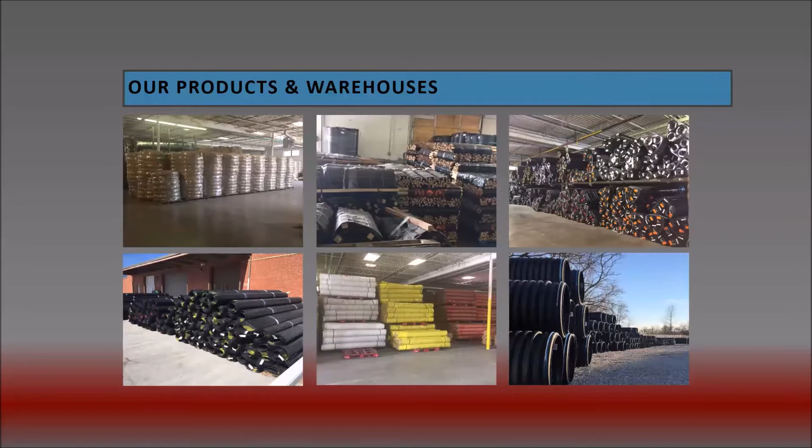I love to talk about the water cycle. I just got off of a national conference this morning where I was able to talk about some green infrastructure, and we are just a tiny piece of the global spectrum there for water. And one of the speakers this morning said that fresh water, stormwater, if you will, all together is about 2 teaspoons out of a gallon full of water that would make up the global water on the earth. So that sounds like a little bit, but it's huge importance because we've got to do the best we can with that tiny little piece that says fresh water. And one of the most important things we can do is protect our soil and our environment from excessive water.

My guest speaker today is Tyler Searle. Tyler is Muscle-Wall's technical sales engineer. He studied at Utah State University in Logan, Utah. He focused on hydraulic engineering and received a BS in civil engineering. Hey, shout out to my fellow civil engineers. He is a transportation erosion control supervisor certified through CDOT, Colorado DOT. He specializes in applications with environmental risk mitigation needs. He aims to use his engineering knowledge and project experience to create a paradigm shift towards a safer and more resilient project future.

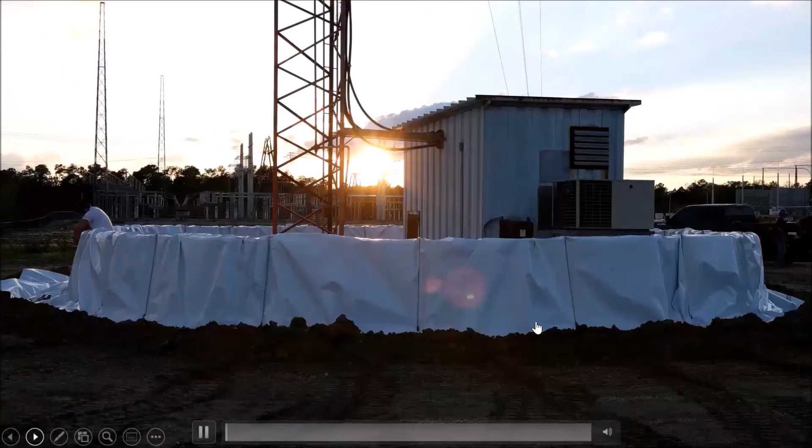Okay, we have just a few short videos throughout this presentation. I'll just let the videos play through and then we'll jump into the details on the back end. I think they really show some valuable insight into the system being used on site and in live applications.

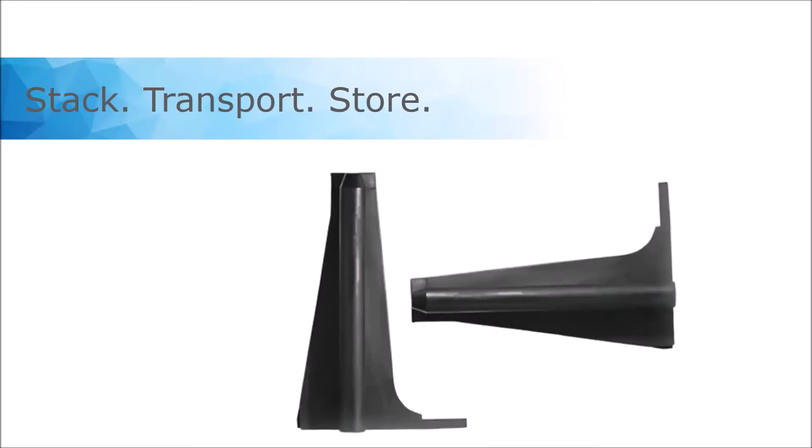This just shows how the walls stack and are inverted. And then this shows how our system is stored and transported. This is a key asset with the Muscle-Wall system, especially when we're competing against sandbags, rock gabion systems, concrete barriers, what have you. Essentially we're shipping air when we're mobilizing the product.

Just for a quick number comparison, I like to draw the engineering number comparisons: one fully loaded semi-truck can hold over 1,500 linear feet of our 2-foot barrier. If you're looking at a similar project with 1,500 linear feet of barrier using rock or sand materials, you'd be at over 41 semi-trucks just in material alone. You can imagine the difference in logistics and costs of shipping, and also the toll on the infrastructure for that municipality or what have you.

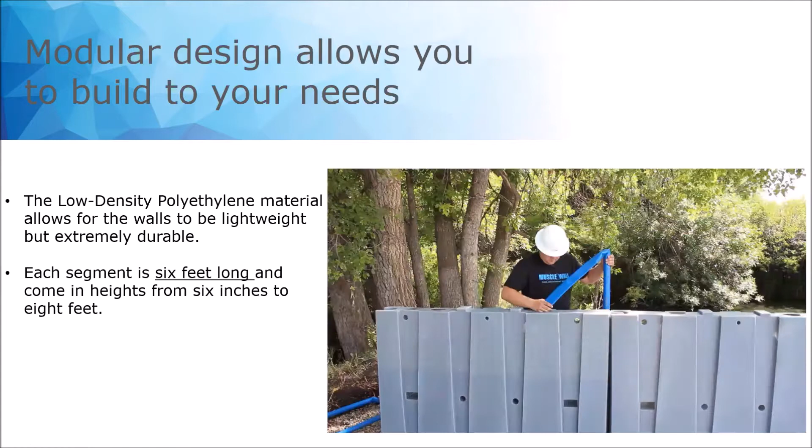And then I'll let this video play. Begin by setting your first wall in place, and then subsequently sliding each 6-foot section in place using a coupler joint connection on the end of each wall. Once a section of walls have been set into place, you'll want to begin filling each unit.

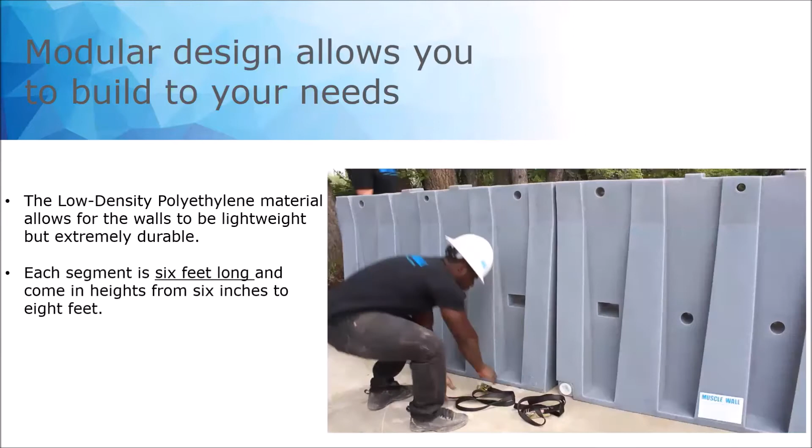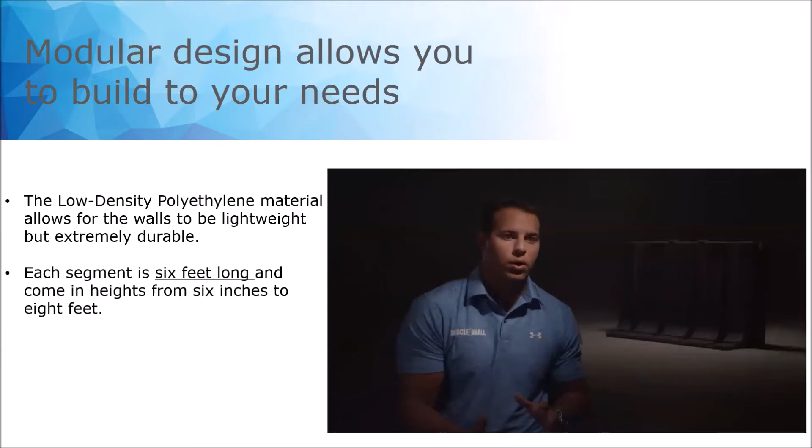The liner is then deployed over the muscle wall system. On the back side of the system, cut a small horizontal slit in the liner. Pull the non-ratcheted strap through the slits and then tightly secure them down.

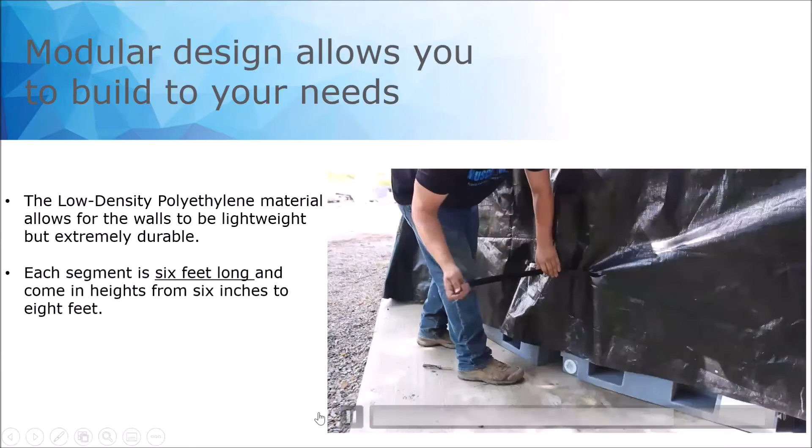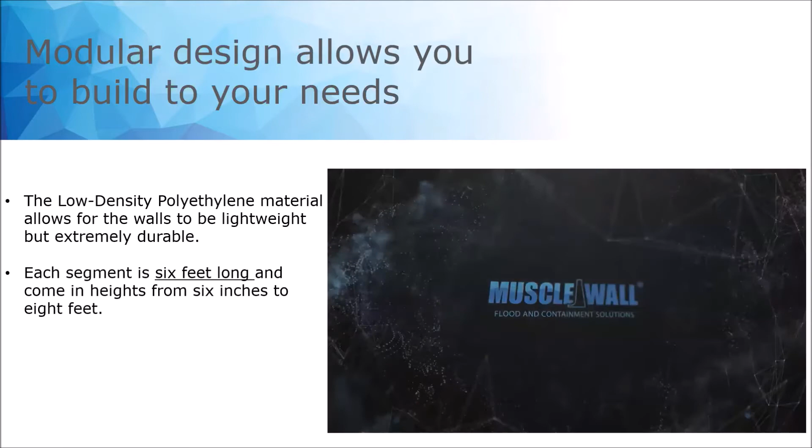Okay. So that's essentially our SOP video. All right, let me jump ahead to the next slide here and go back one. So what I just showed was our SOP video. That's how we deploy our system. Essentially, it's those 4 simple steps. You drop the wall in place, you fill the wall with water to match your risk, and then you attach liner and straps. Depending on your application, there'll be some versatility in how you can attach a liner to complete the system.

Moving forward a little bit, I'm just about done with the logistical and engineering side. Bear with me, guys. I know this is just kind of tedious a little bit, but we're going to get into the pictures and applications, and it'll make a lot more sense.

Really quickly, though, I wanted to show that our walls can interlock and connect at these different heights. So right here, we're starting with a 6-inch wall on the front side, drive over wall, then moving to our 2-foot, 3-foot, 4-foot, and then 6-foot wall on the back side. This is for a refinery down in Houston where they wanted to have a sloped wash station.

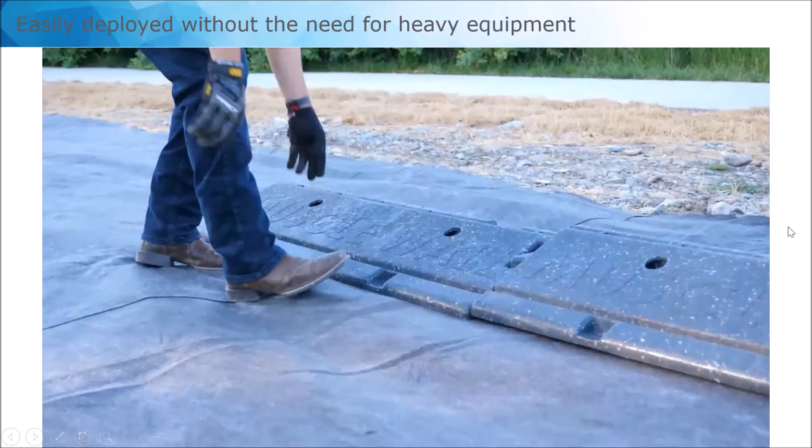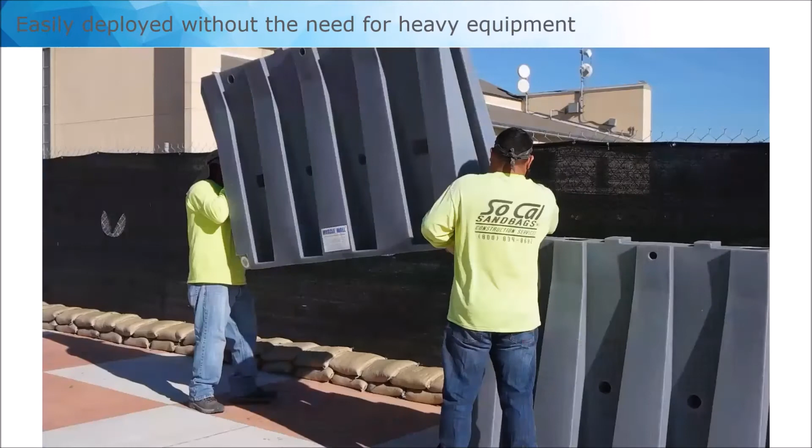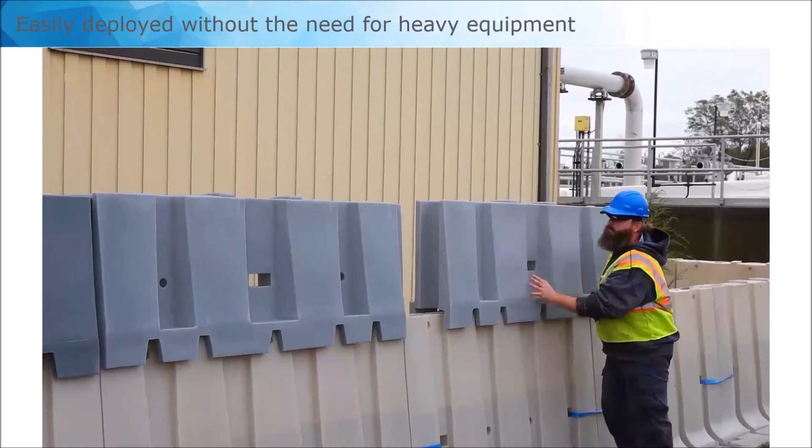And then this shows our walls actually being dropped into place by manpower alone without heavy machinery. This is our 6-inch drive-over system for wash stations, site containment. That's our 2-foot high, 6-foot wide muscle wall system. And that's our 4-foot high wall. As you can see, it has that LDPE play. So it's lightweight, it's mobile, they're able to drop it into place, but then it also has that malleability to it. It's not a rigid system, so it does have some flex to work with being dropped into place and work with the dynamics of pressures.

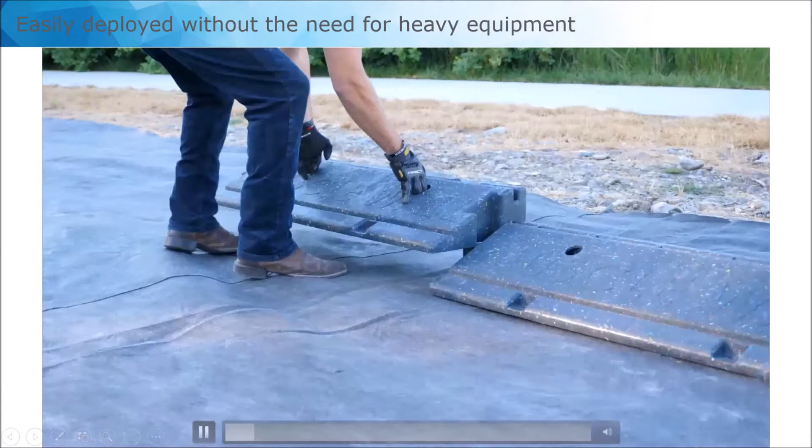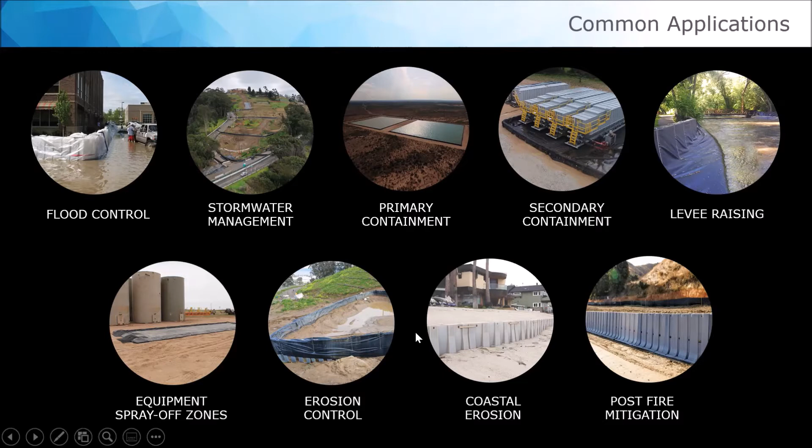And then I'm finishing up the overview and logistical side here, but again, I just wanted to bring up the idea that at the core of our solutions, what we do is we design and have engineered retention devices. And so they're used in a variety of different spaces, flood control, stormwater, and then containment and erosion as well. And we'll dive into some of these specific details as we get going into the presentation.

Okay, so I'm gonna just jump right into some applications. This is where it's gonna be a lot of fun. And several of these we've worked with Bowman and the ASB Quick Supply Cascade team, and so I'll point out those projects. Specifically, this project right here is a Bowman project where they helped us out. And this is a stream diversion over in Colorado.

So that's that intro video where you're seeing that stream diversion really at peak flow. This is that same stream diversion when we deployed it over 2 months ago at this point. And so essentially, again, our system is a mobile retention device. And so it can be used to divert flow, control flow, capture it, what have you. And so right here, we're looking at doing a stream diversion.

Originally, they were looking at pipe options, concrete jersey barrier options, what have you, and then staging the river so that they would pull the river to one side and then pull it to the other side so they could replace those abutments and the bridge. And ultimately, we got in there and decided that we could use our system and save them some staging and just divert that entire stream through our channel, and do a 4-foot channel right here.

And so essentially what we did is we lowered the walls into place. Again, they're hollow walls. And so we floated them upstream, teed in the corner units or towed in the front walls, just sunk those into place. And then one by one filled each wall and dropped them into place. And then our last step was to attach that liner, making it impermeable and just capturing all of that water.

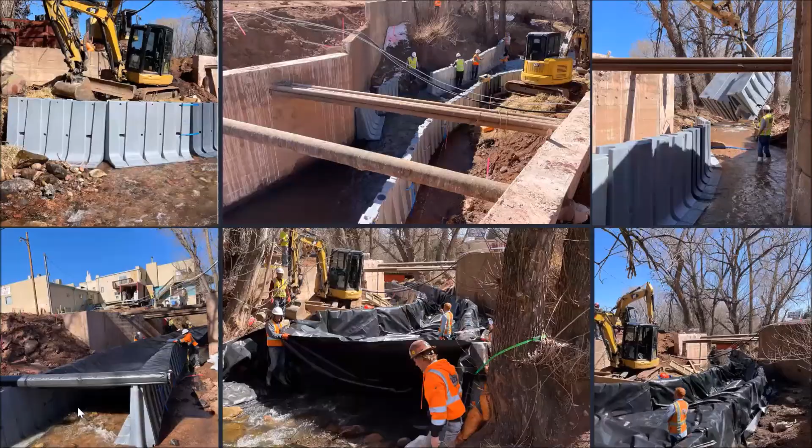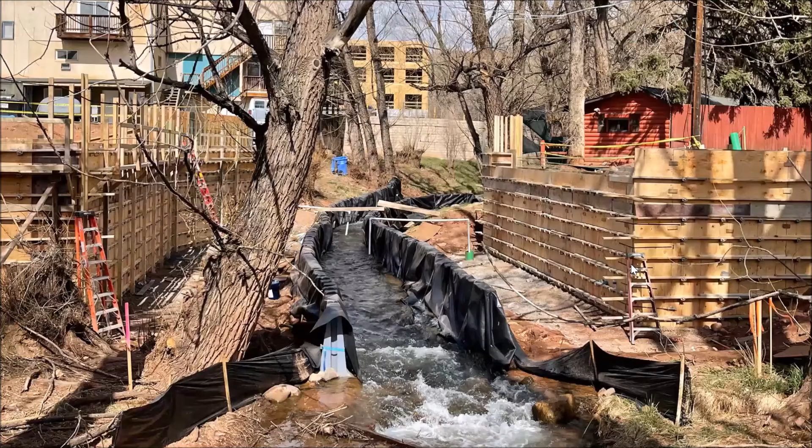And then here's some pictures from that project. Again, showing the system being towed in on the front side and then working down that slope one wall at a time. And then we staged the liner over the channel and then attached the liner and dropped it in right in front of the walls at the infall of the stream. And then just another picture, that's the same stream diversion, just doing a fantastic job. And just one of our key applications.

And just a note, total deployment time with a team of 4 was 7 hours. And that included everything from unloading the semi-truck, staging the site, moving a couple of rocks just to get a relatively flat surface. Our system does work well with the topography and working around obstacles. But in some cases, we had to get in there and just move a few rocks that were in the way, just to flatten it out a little bit.

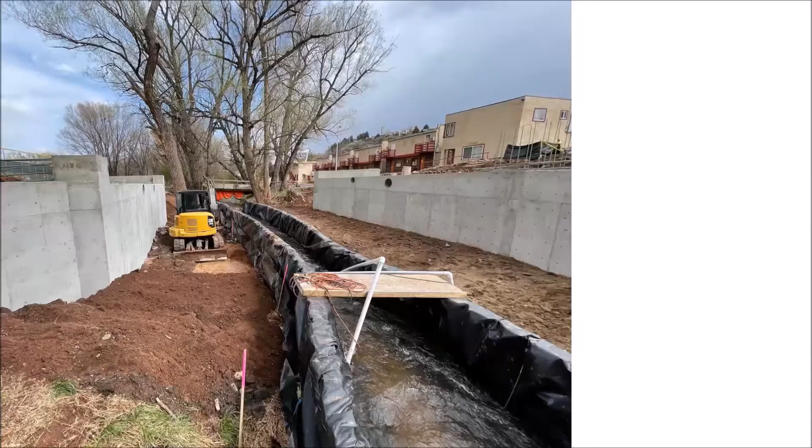And then just one of our last pictures right here. At this point, they've actually deployed new riprap and abutments. And now they've got a new bridge in that they just installed towards the end of last week. But again, one of those situations where they're really constrained on the real estate and the amount of space that they had to work with. And so they essentially made a Venturi weir with our 4-foot walls and just channeled all of that water throughout the section. But a really fun project that we worked on with Bowman.

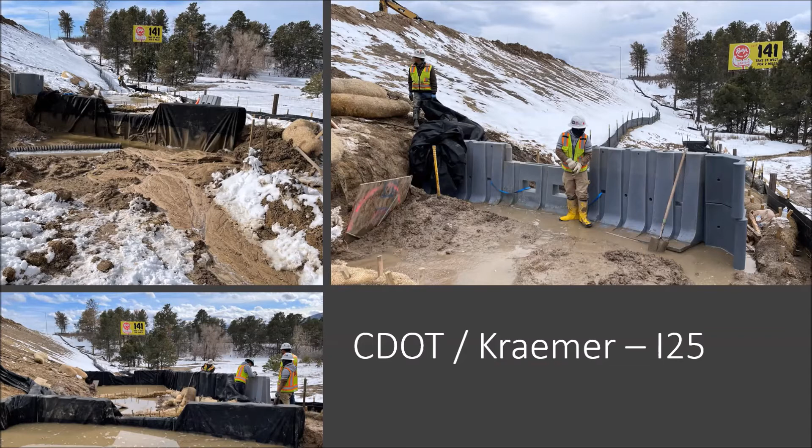And then this is another project that we worked on through Bowman and with the Colorado DOT and Kraemer Construction as well. This is right off of I-25. Essentially they've got an outfall where they have 5 acres of snow melt that all collects in one area. And so their traditional BMPs were just getting blown out. So they gave us a call. They had this emergency situation where they had crews out there day in, day out, just wrestling this section and continuously trying to reset BMPs as they failed.

And so they called us up, said it was an emergency situation, and we immediately got in there and deployed our 4-foot and 3-foot walls to have a weir type basin for their swale. And since then, it's been working fantastic. They've had these weirs in place for about 2 months now, and it's just completely eliminated their risk in this area. They haven't had to revisit it since.

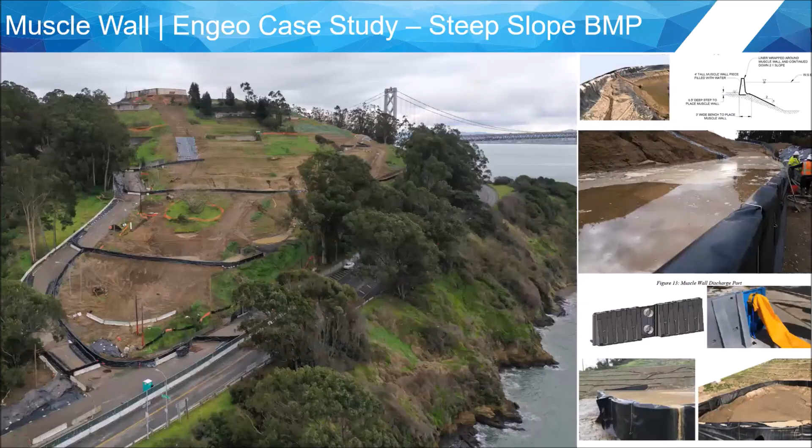And then moving forward a little bit, I'm going to dive into stormwater, a few of our different applications and recent case studies. And then after that, we'll hit containment. And then towards the end, I'll briefly touch on flood control, again showing the full versatility of the system. But on the stormwater side, this is a really fun project. This is actually over on the West Coast. This is Treasure Island. And they're using our system as one of their key BMPs.

And essentially, we're dealing with really steep slopes. And their traditional BMPs, hay wattles, silt fences, just weren't able to keep up. And so the engineers spec'd in Muscle Wall to appropriately defend against that risk. And essentially the construction crew just went in and dropped the walls into place on the hillside and then filled them with a hose. Again, they didn't have the mobility they needed to get K-rails and stronger solutions onto the hillside.

But at the same time, a really high regulatory space. If they had any failures, this project would have been at risk of failing or, at the very least, really significant fines. And so we got in there and just completely shut down their risk. We're a really robust, strong BMP solution. It might not fit into every project and every need, but certainly in those areas where you have high risk and high debris flows, erosion, things like that, that's where we're an excellent solution to match that higher risk.

And then we'll just walk through a couple of these pictures right here. But again, on this hillside, these are the same pictures from that project that I was just showing a bird's eye view. But essentially, they were dealing with 15 to 50% grades on that hillside. And so what they did is they installed a series of 9 detention basins to help dissipate that energy flow moving down the hillside and just capture as much of that sediment as possible.

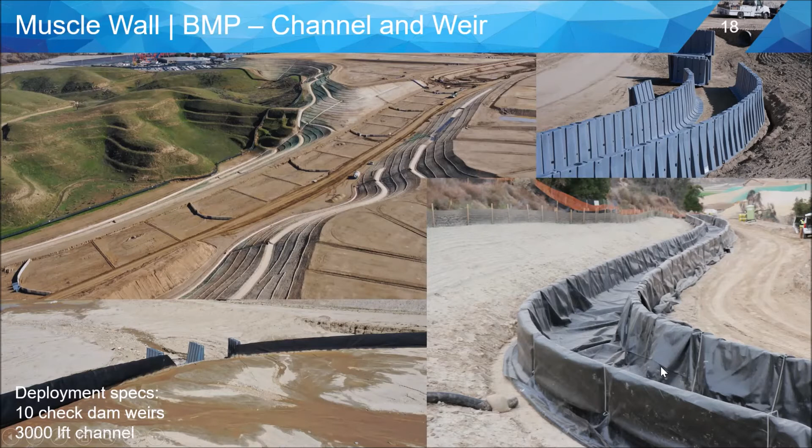And just a side note here, we're seeing 2 different liners being used. To the left-hand side, that's where they just wrap those weirs with the geotextile, letting that water filter through the kiss-throughs, through the juncture points of the walls, and then seep over that 2-foot weir. And then to the right side here, that's where they used an impermeable liner. And this is where we had a liner crew go out there and actually manufacture and custom design this liner on site as they went. But again, that's where you'd use an impermeable liner for that complete control.

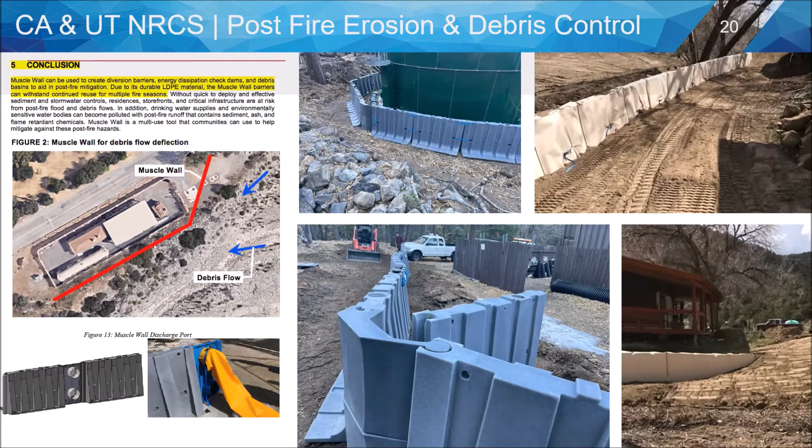But one of the notes is the California NRCS in their projects, they actually do not use a liner. They're just deploying the system as is without a liner, and they're looking for that 95% control where they're being able to divert that debris flow around the key infrastructure piece, but then they're expecting to have minimal seepage, and that's okay. They just want to, again, have control of the majority of that flow.

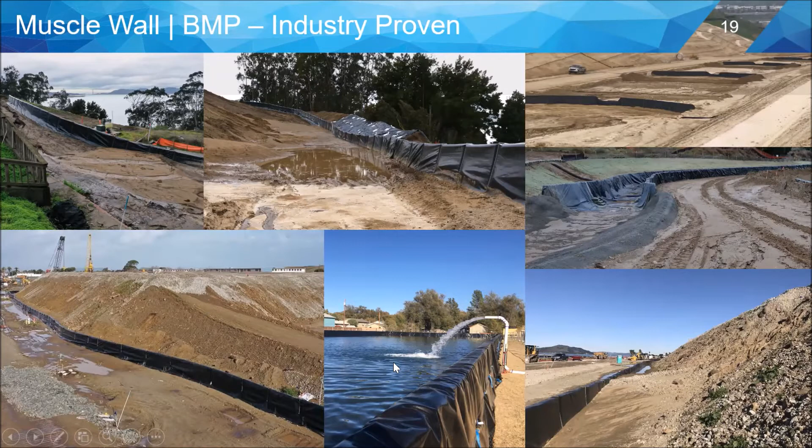And then just some finish up pictures right here, just a few more pictures to round out the idea of how our system can be used in a wide variety of ways in the construction and stormwater space, both again as a BMP solution for check dam weirs, also for channeling, and then certainly stockpile containment, whether it be stockpile containment for soils or also containment for fluids. Again, our system is engineered to retain and hold that.

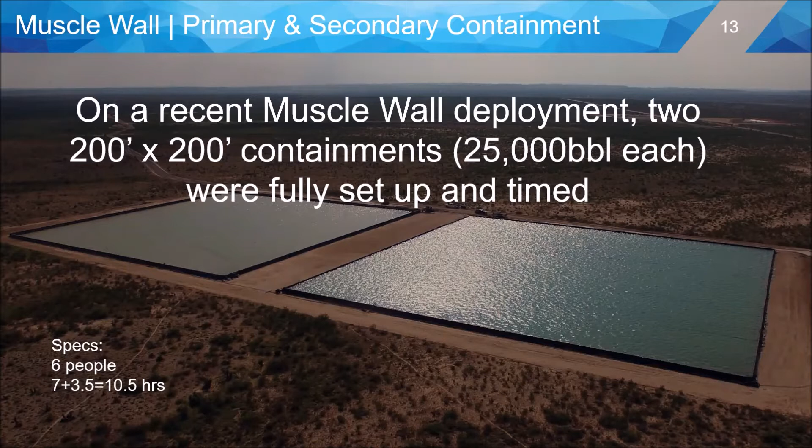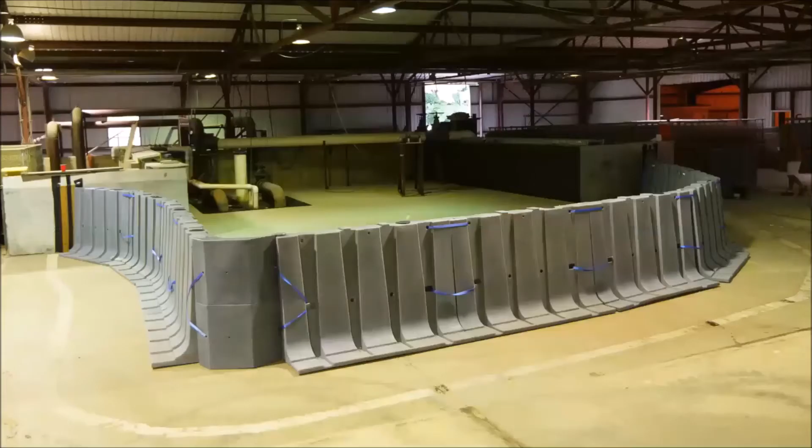Okay, so I'll pause it just for a second. But again, this is our Army Corps testing. So it's just a minute snip of that testing. And I'll talk over the testing as we go. But again, key video here.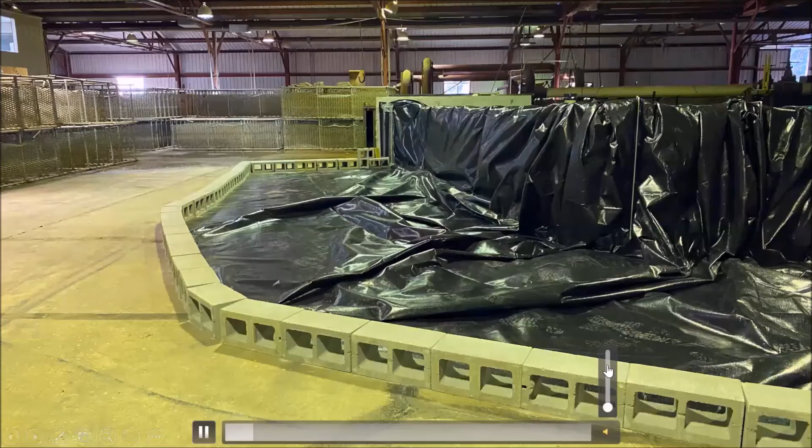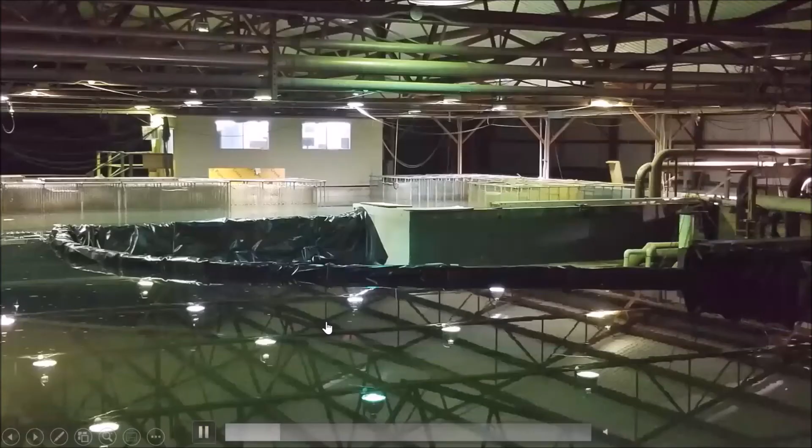Okay, so essentially what happened is they did a variety of tests over a 10-day period, simulating a variety of flood type situations, where they had a hydrostatic load test, they had debris impact, current flows, overtopping the system, and then also wave impacts as well.

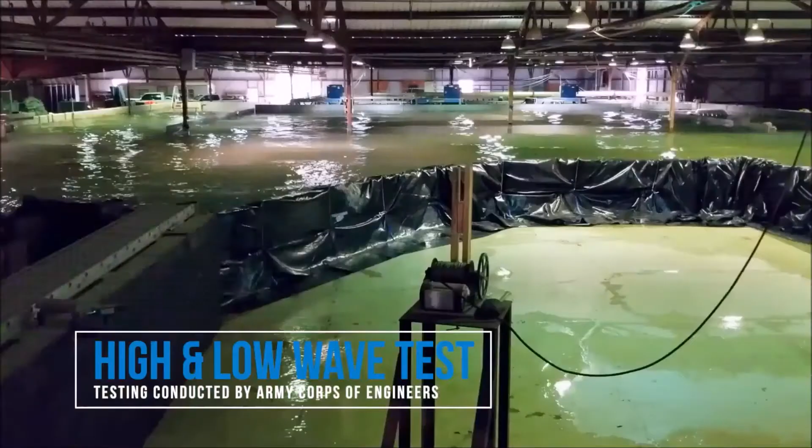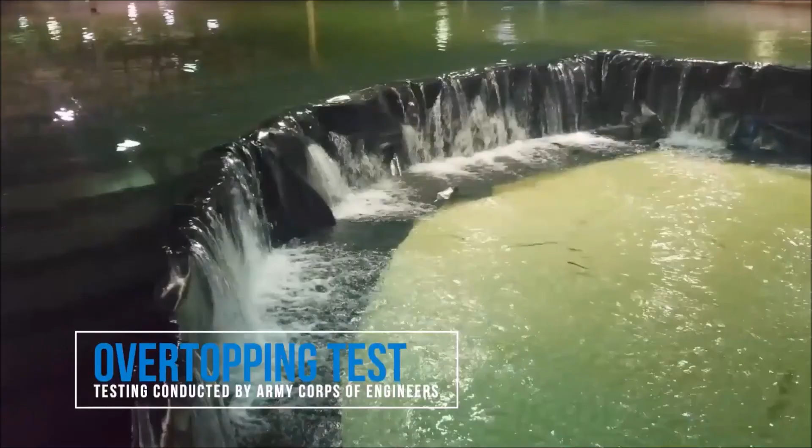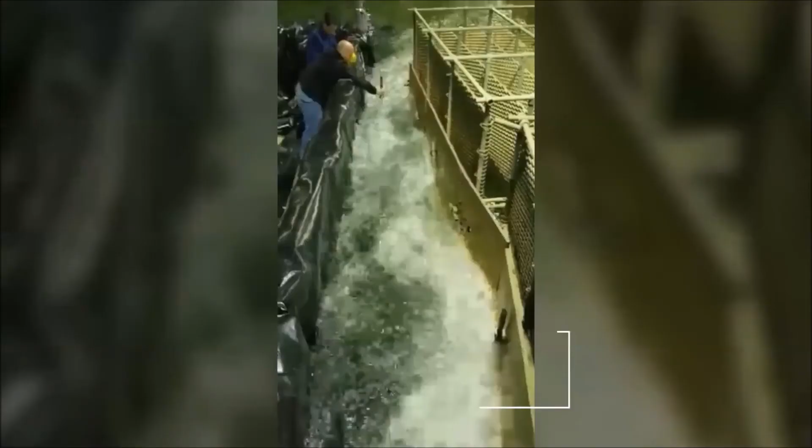Overall, we did successfully complete all of the U.S. Army Corps testing. And not only did we complete all their testing, but we tested best in class. So for our class, we're the only solution to pass all of their tests at a 4-foot height. And we're directly comparing against sandbags, HESCO barriers, and typical flood solutions. And what is also useful is that we can directly compare our system against the other systems that have been Army Corps tested and approved.

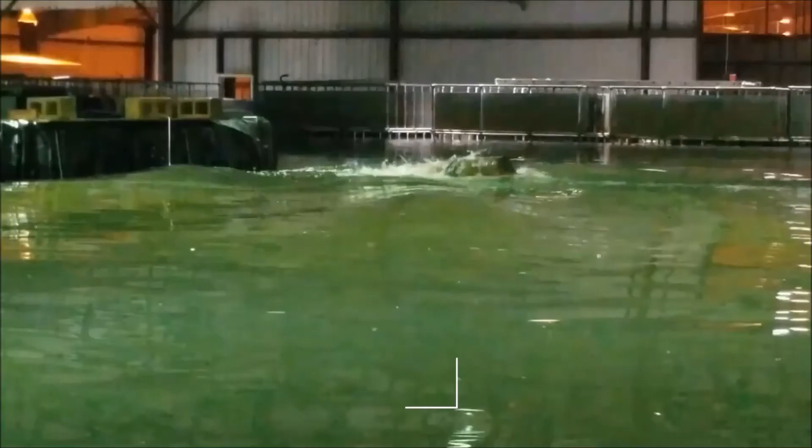It's the same report, and that way you can, apples to apples, see how our system compared and came ahead. And that's the debris impact test, again, showing how that LDPE material comes into play, being able to take on debris impacts and dynamic flows without fracturing or breaking.

Okay, and then just a couple notes here. I actually pulled this directly from that Army Corps report. And so this is just showing our system directly compared against their standard of sandbags. And so we certainly had a much faster deployment time, 7.5 hours compared to over 200 hours. That's definitely expected. But more importantly, what I want to draw attention to is that we had no maintenance throughout that entire testing period, whereas the sandbags repeatedly had maintenance throughout the testing over that 10-day period to be able to maintain their system.

And that's a key idea, is that our system is designed so that if it's deployed per SOP, there's little to zero maintenance that would need to be done. And that's definitely key on the flood side, because if that maintenance is not kept up, eventually they're at risk of a catastrophic failure and of the system failing altogether. And then again, just a side note, we also had a 4 times lower seepage rate.

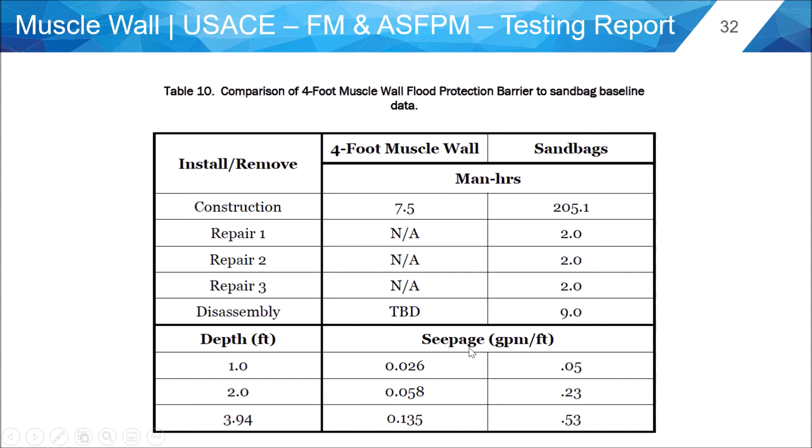And then just directly comparing, sandbags are still the #1 flood fighting solution in the United States, which is just crazy. But really what we're trying to do is bring a more sustainable and innovative solution to the market. And so we'll immediately save on real estate space, at deployment time, and also being a safer solution, but then also cost comparison at the end of the day.

What we found, and the Army Corps has found, is that when the actual true cost of the sandbags is considered with the material costs, the logistics of transporting the materials, labor to actually deploy the system, and then all the logistics to remove the system after it's deteriorated, with all of that considered, oftentimes we're as cost effective, if not more cost effective, on that very first deployment. And then again, having that reusability and all those valuable points of the Muscle Wall system, and being able to versatilely use it in other spaces as well, not just flood control.

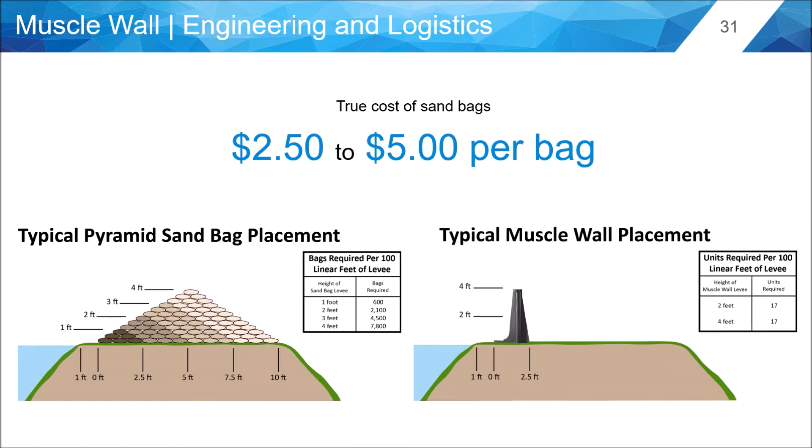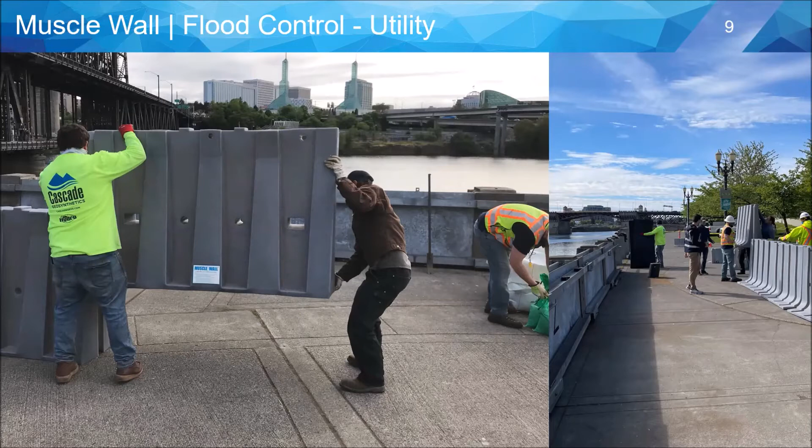And then on the flood side, just to kind of showcase what we're about, this was just about 2 weeks ago. We went out to Portland and helped Cascade Geo with this demo for the Water District and the City of Portland, showing our system and how it could be used as a flood defense system for the City of Portland. But this is one of those things where we'll go out there, we'll train any customers, anyone who's interested in learning more, we'll oversee that first deployment, and we'll offer that business support throughout the process.

And this is a key idea with our system, is that it is a perfect application for any wetland or marsh projects or stream projects where you already have water on site. That's not an issue with our product. As long as the water is shallower than the height of our system, we can actually float our wall into place and then sink it into place, attach that liner, and then trash pump the water from the backside over to the front side or the wet side of the system. That's how we do those stream diversions or cofferdam type applications, wetland projects, what have you.

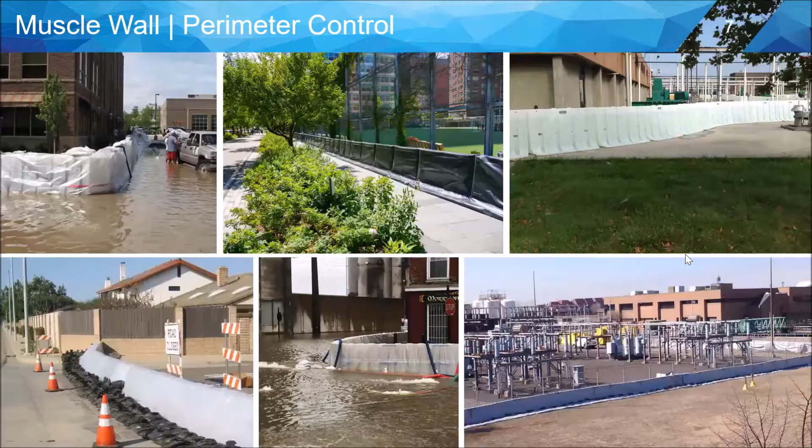And then on the flip side of flood control, definitely perimeter control is a key space for us, not only for infrastructure pieces, downtown areas, but also closing off those egress areas to have an effective community-based flood plan in place.

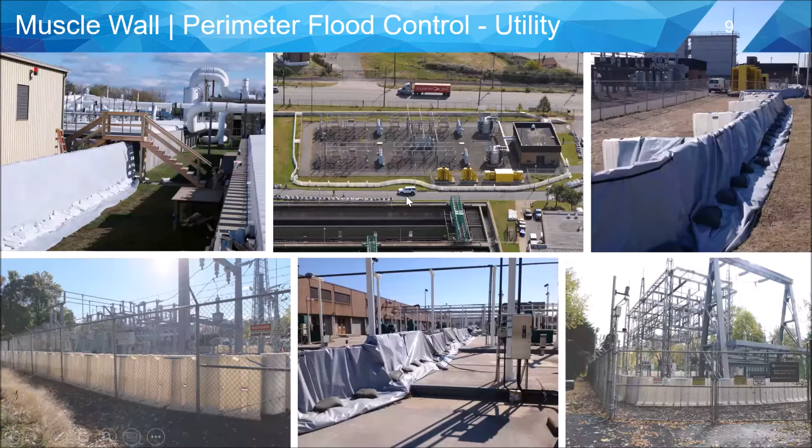And then I do want to just key in on a couple of these pictures of our system being used for perimeter controls for utilities around the country. But a couple ideas here. One, in the top right picture, you're seeing our system teed in to this flood wall right here. And this is actually for Passaic Valley Sewerage up in the Northeast. And essentially, this is their first line of defense for their seawall against those nor'easters.

And so with those waves and the expected storm surges, they just really felt like this wall specifically would be at high risk. And so what they did is they just teed in 4 of our 4-foot walls filled with water to add the extra column support on the backside, just to give extra support with those storm surges.

And then also showing in the bottom middle picture, showing our system hopping over a curb. Just a side note, but at each juncture point, the walls can shift. So they can shift vertically to hop over curbs or work with the topography as you need it to.

But again, just showing our system in a few different ways here and showing it with the liner and without the liner. Oftentimes they'll deploy it without liner for flood control if they're going to leave it up semi-permanently, just with egress areas set to the side. And then they'll just deploy the liner as need be, depending on the UV resistance of that liner.

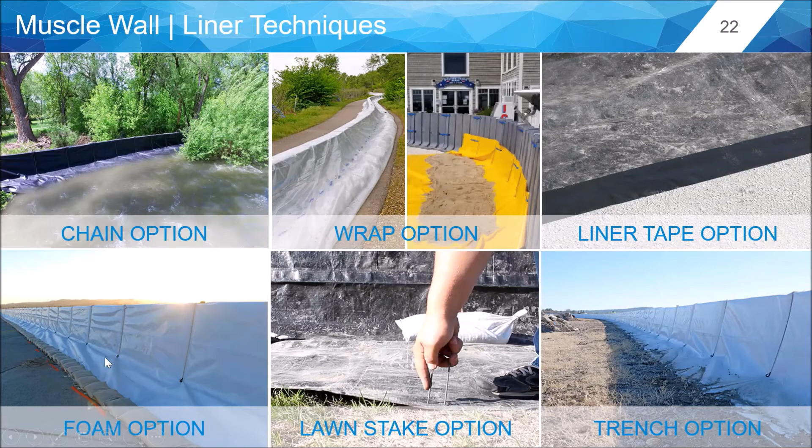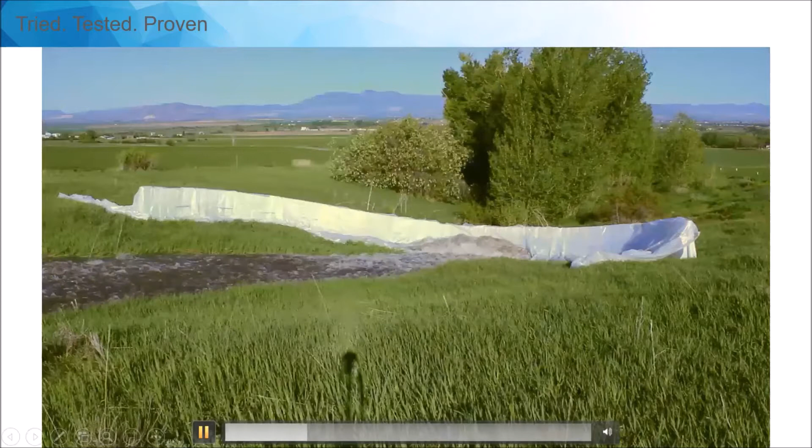And then this is some of our early testing. This was testing done with the USU Water Lab and the US Army Corps of Engineers. Essentially what we did is we simulated a flash flood type situation, just releasing that storage of water and letting it gain some momentum as it goes down the hill and then just crashing into our 4-foot barrier right there.

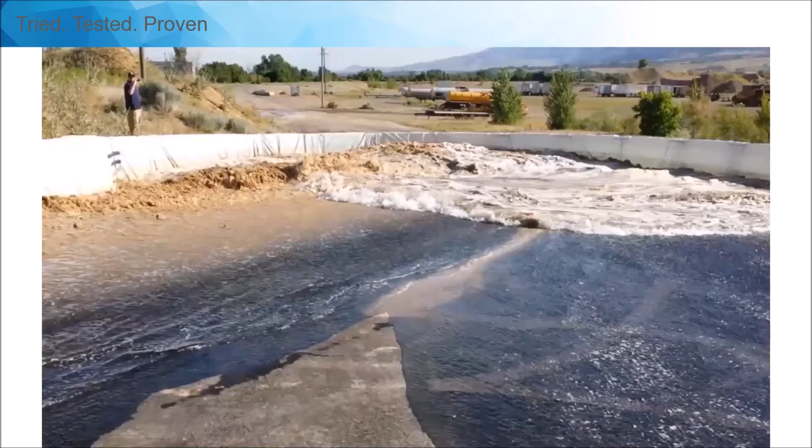And again, a few key notes. You're seeing a bend at the juncture point so that we can create this basin shape. You're also seeing that the system has no metal components on the backside. There's no stakes. The walls are just dropped into place. In that instant that the water or the material hits our system, it's acting to help put pressure on the toe to hold the wall in place. And so our system does do well with dynamic flows or flash flood type events.

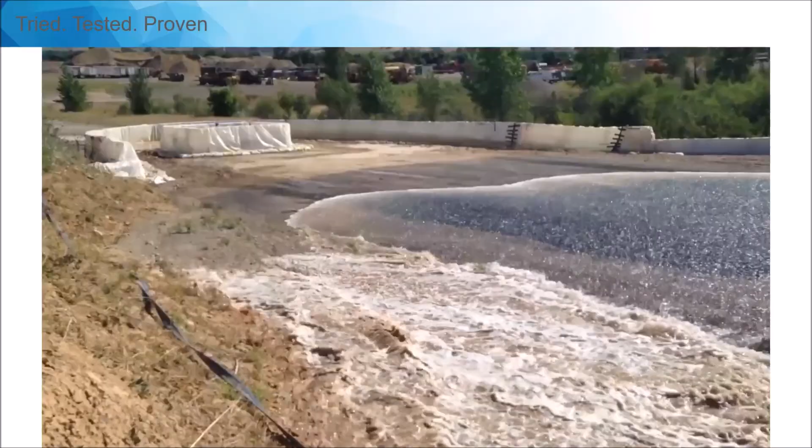Okay, and then I know I moved fast. I just wanted to fall in on a couple more key ideas here. Again, the system's just a mobile retention device. So it's designed to retain, it's designed to be mobile, and then you can fill it with water on location to add the extra weight and strength. And then each wall is designed so that it has a toe proportional to the height of that wall. So each wall is designed to retain at that height and even be overtopped without sliding, tipping, or failing in any way.

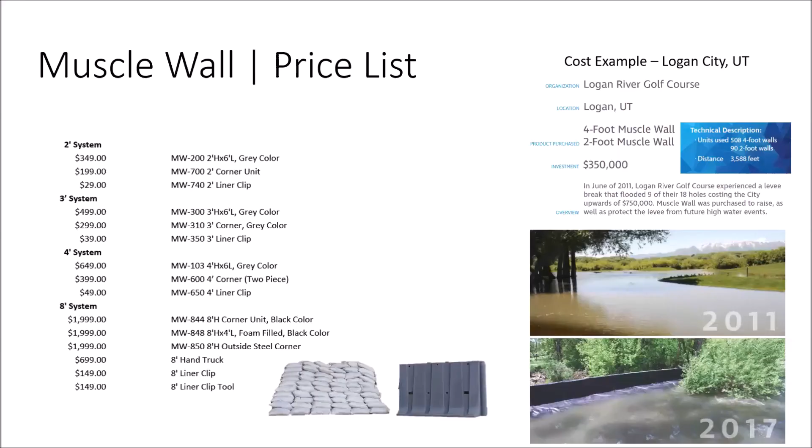And I have some personal experience. I'll just show the final slide. I'm going to tell a personal story before I go back up to that very first slide of yours. I may have told you this briefly getting to know you. I do mission work all over the country and sometimes Central America. And a lot of the mission work I do is natural disasters. I've done hurricanes, tornadoes, floods, a lot of poverty missions. And every one of those natural disasters or poor situations are unfortunate and devastating. But I can tell you there's almost nothing worse than cleaning up flood debris. And hurricanes Katrina and Rita brought a lot of floods with them, especially Hurricane Katrina.

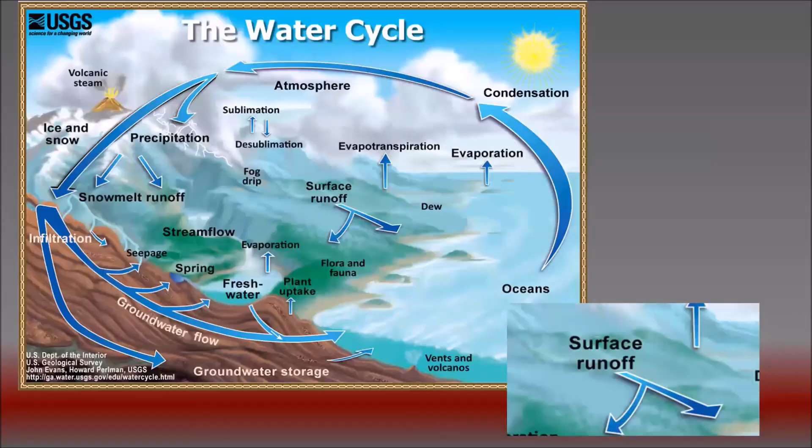So if someone ever talks about sticker shock with something like MuscleWall, wait until they lose a bridge in a case like this, where they didn't protect a pier well enough, or an end of a bridge, or some other structures downstream, or some other diversion near a dam when projects are being done. But if you start to talk about massive, large scale flooding, not only in private property, but large public features, it gets into the billions with a B, kids, billions. So it's hard to put a price on that kind of protection and risk management.

There are people in the world that are very good at risk management. Most of us that went to college for civil engineering, Tyler, you can attest to this, we didn't learn that level of liability and responsibility for risk management, not in the billions. Yeah. We talked about erosion and sediment control. We talked about geotechnical engineering to protect building footings, houses, and some of us got into bridges that were structural. A lot of the people on this call are involved with roads in one way or another, but that large scale risk management is not going away. And in recent years, we've just seen it grow in responsibility.

And while I'm not here to plug another firm, I did see the name of NGO on there, and we're talking about some people that you folks know that we could connect with, people here in the Midwest, out in the Rockies, in the Pacific Northwest, who can help the decision makers figure out what they've got to do with something that's been tested by the Army Corps of Engineers that can protect life and property. Do you want to touch on that just briefly, even though we don't have a slide for it?

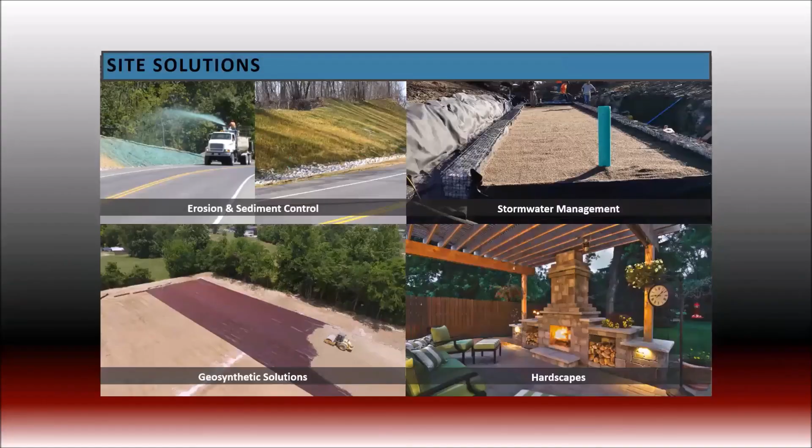Well, and one of the things that people here in my part of the world in the Midwest don't realize is how devastating, I'm going to turn the volume off on this if I can, the wildfires can be on an environment where they get tremendous flooding and movement of sediment. And I think that's part of what you're doing in the Pacific Northwest. You could talk about some of that fire mitigation again.

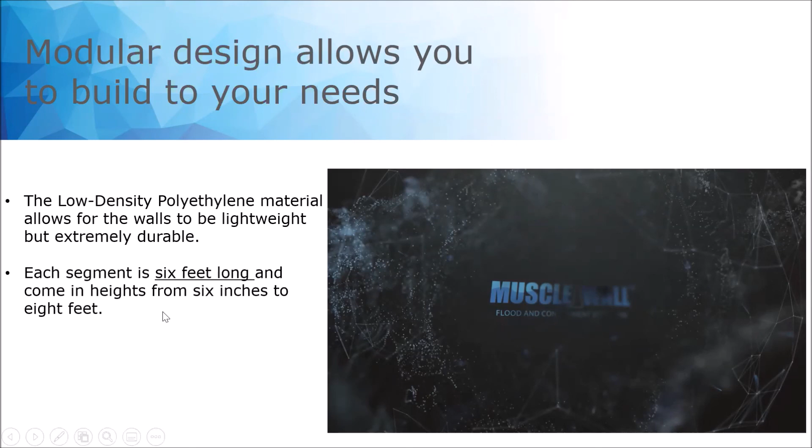Absolutely. Working with the NRCS and using our system for erosion control, debris erosion control, and then also flows, overtopping rivers, overtopping channels, all those applications, in Oregon, California, and Colorado. That's what our system's being used for. And all of those areas were approved by the NRCS. We're a key solution for them. It's just a matter of going in there and bringing that exposure of our system.

It just seems like there's so many firms and communities that didn't used to have to deal with this stuff, these kind of tragedies and challenges, that do now. And like I said earlier, it's not going away. It's just going to continue to happen on a more frequent basis.

Curtis has a specific question. How many gallons? This is a tough one to answer because it's the area that's up against it. But how many gallons does it take to fill? I got you. No, it's very specific. To fill a 4-foot high section, 6 feet long. Yeah, so that's the easy question. Thanks, Curtis. So that's almost 200 gallons. What it ends up being is almost 1,400 pounds.

And I should go into those notes just really quickly. Here, just take over if you want. Yeah, sure. I'll give it back to you, Tyler. Thank you. I'll just go back to our overview slide with our different heights.

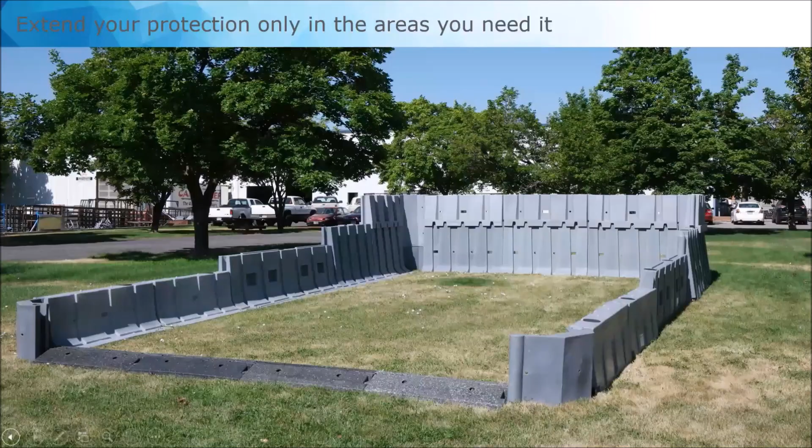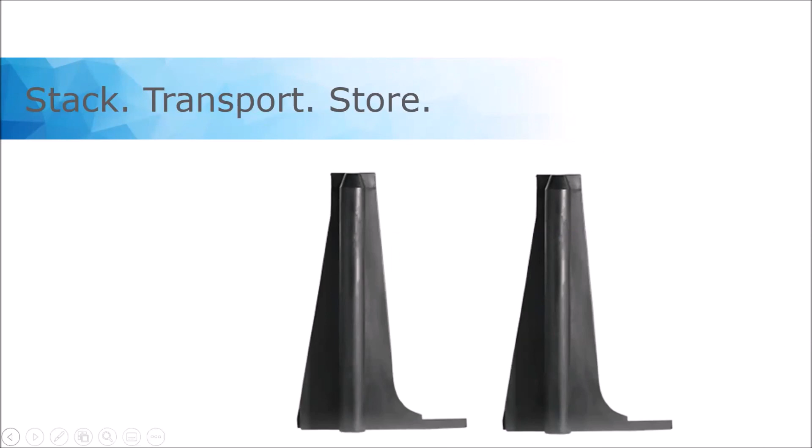Let's see here. Just to give you some points of reference for weight and things like that. 200 gallons, you said? Yep, it's about 200 gallons for a 4-foot wall. It's a little bit less than that. It's closer to 175. Essentially, though, it's 1,400 pounds full for a 4-foot barrier. And then empty, it's 110 pounds.

So just right here, just for a couple weight notes. Our 4-foot wall empty is about 110 pounds. Our 3-foot wall is about 75 pounds. Then our 2-foot wall is about 50 pounds. And our 6-inch system is about 35 pounds. So heaviest wall would be our 8-foot system, but commonly used, our 4-foot wall is about 110 pounds. And when it's filled with water, our 4-foot wall is about 1,400 pounds. And so that's how we also use it as a column support, in areas with high risk.

I love it. That's fantastic. As a reminder, for those of you that didn't get your questions answered, you will have a chance to ask those later. I may have taken over from you, Tyler. It sometimes happens. That's okay. When I'm having to click around on participants. So we've got a lot of participants on this call. I think we got to all the questions and answers.